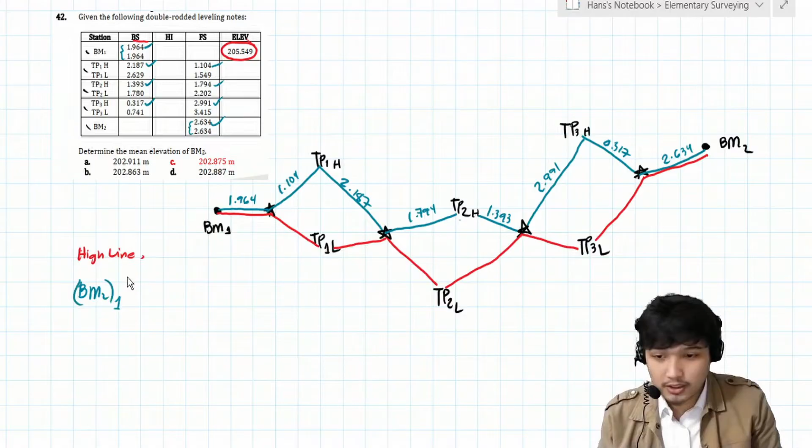So, with that, masolve na natin, no? So, let's say, benchmark 2, tas pangalan natin siyang sub 1, no? Or sub H na lang, class, for the high line measurement.

So, paano ba? So, ito, pangalanan ko to, class. Palitan ko na rin to, class, no? Ito, benchmark at B, using yung high line.

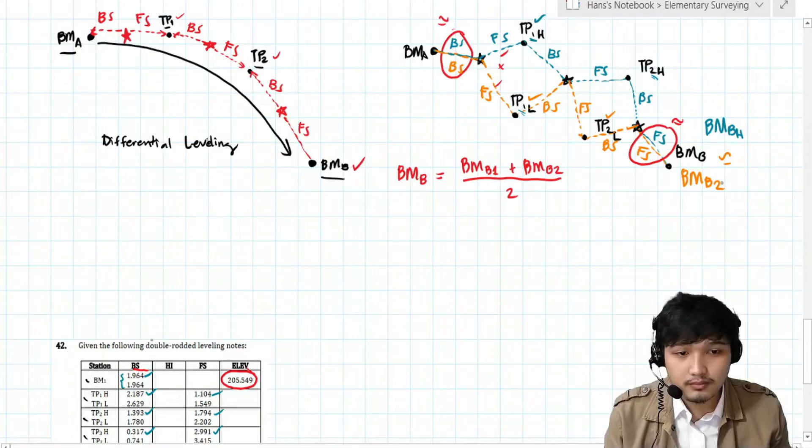Ito, magiging benchmark at B, tapos low line. So, magiging

Babago to para lang uniform. So, magiging benchmark at B using yung high line and then using yung low line.

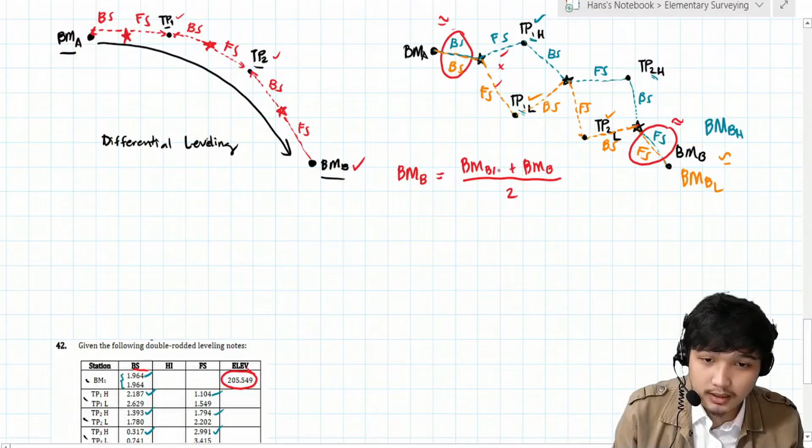Okay? So, ito na. So, therefore, benchmark at 2 using yung high line equals sa benchmark 1. Ilan to, class?

So, this one is 205.549.

So, lagyan muna natin, no? So, benchmark 1 plus summation ng backsight sa high line minus summation ng foresight sa high line. Okay? Gets ba? So, consider lang natin lahat ng high line. So, magiging

205.549 and then plus yung summation nito is 1.964 plus

2.187 plus 1.393 and then plus 0.317 and then minus yung mga foresight sa high line.

Okay, so using yung high line, so ilan yung magiging reading, no, ng elevation ng benchmark 2.

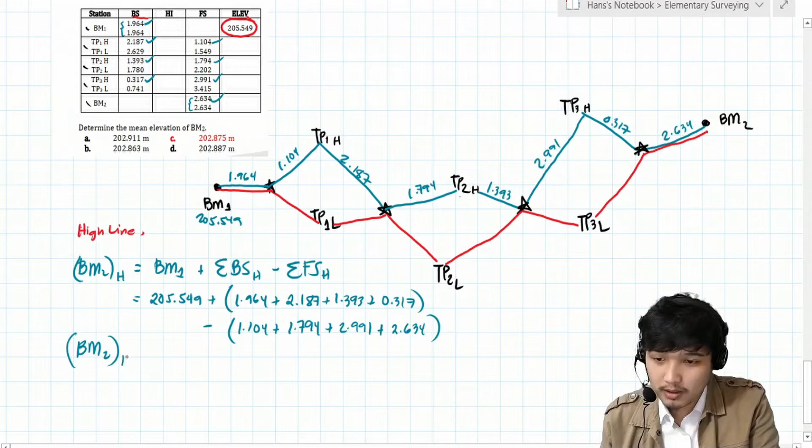Okay, so ang sagot is 202.887. So, check ko lang ulit, class.

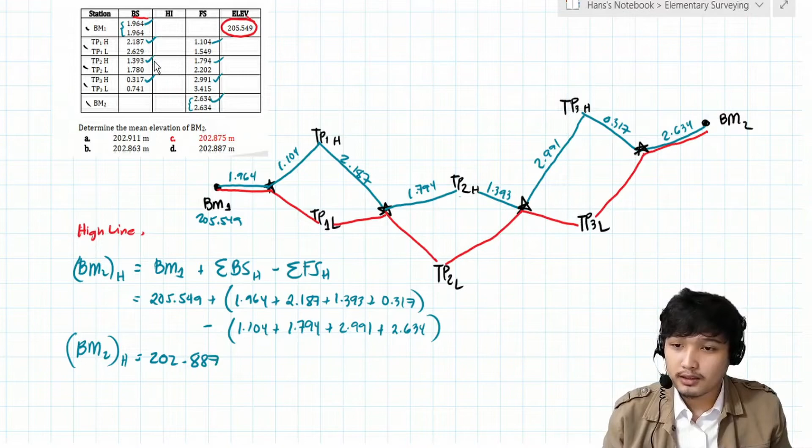Okay, so correct. So, consider naman natin, class, no, yung low line. So, for low line tayo.

Low line. So, considering yung red, so, nag-backsight, ilan ito, class? 1.964. Nag-foresight. So, ito, nag-foresight sa turning point 1.

So, 1.549. So, nag-backsight sa turning point 1. 2.629. And then, nag-foresight sa turning point 2.

So, this one is 2.202. And then, ayan. So, kompletohin lang natin.

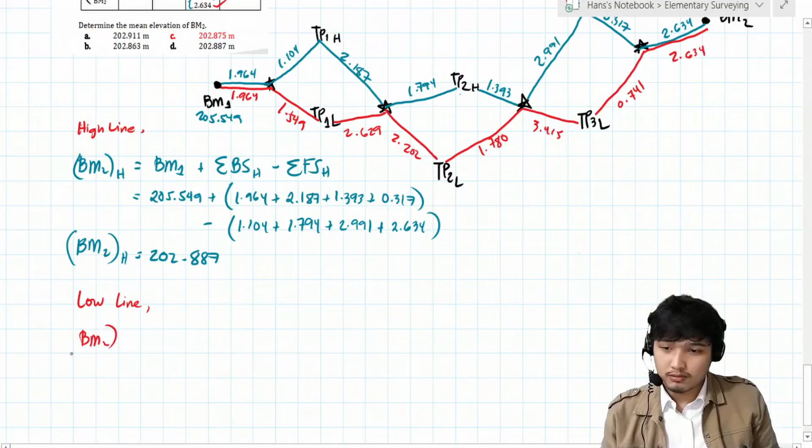Okay, so, ayun siya, no? So, the same. Benchmark 2 using yung low line equals benchmark 1 plus the summation ng all backsight sa low line and then

minus the summation ng all foresight sa low line.

So, simply plug in lang natin to, class. So, equals. Okay, so, ilan, class,

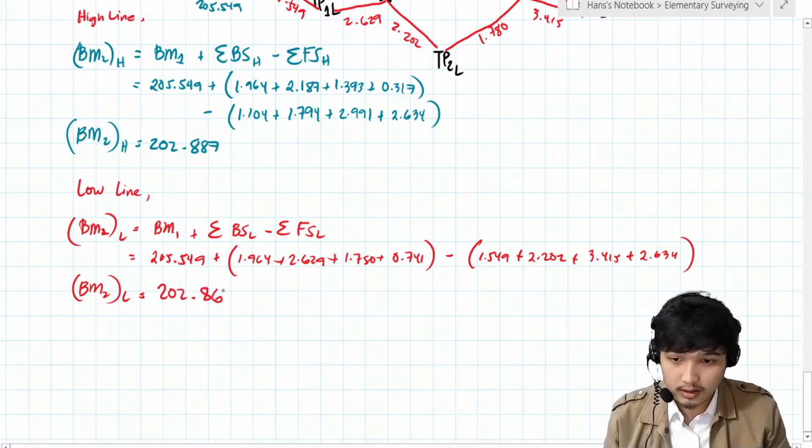benchmark 2 using yung low line? Okay, so ang nakuha kong value is 202.863. Okay, so check ko lang ulit, class.

Okay, so correct. Okay, so using yung two values, so makikita mo, class, almost the same sila. So that the average, no? That the average

elevation ng benchmark 2 is equal sa benchmark 2 using yung high line and then plus benchmark 2 using yung low line divided by 2.

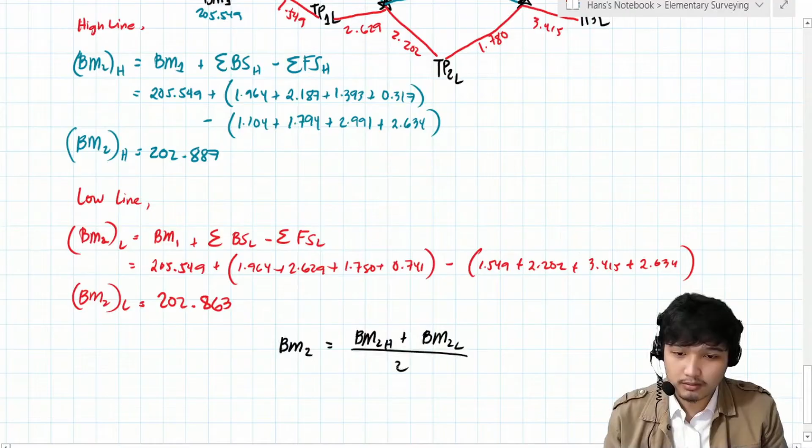So that is 202.887 plus 202.863 divided by 2. So ilan yan, class?

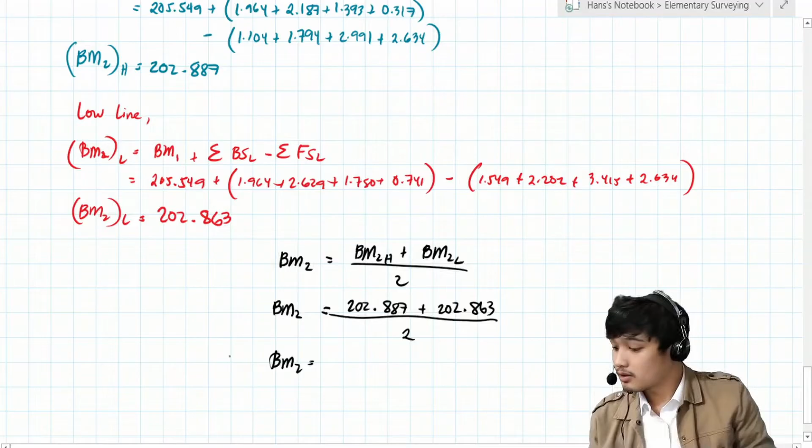So the answer is 202.875 meters. So that is letter C.

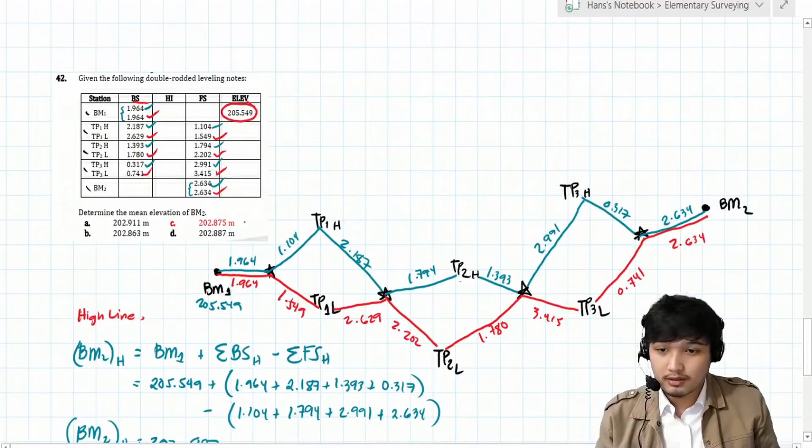So correct. Okay, so sana na-gets nyo, class, no? So ano lang siya, dalawang differential leveling at two different routes but at the same instrument setup.

Okay, so let's proceed ngayon sa next, which is yung ano ba?

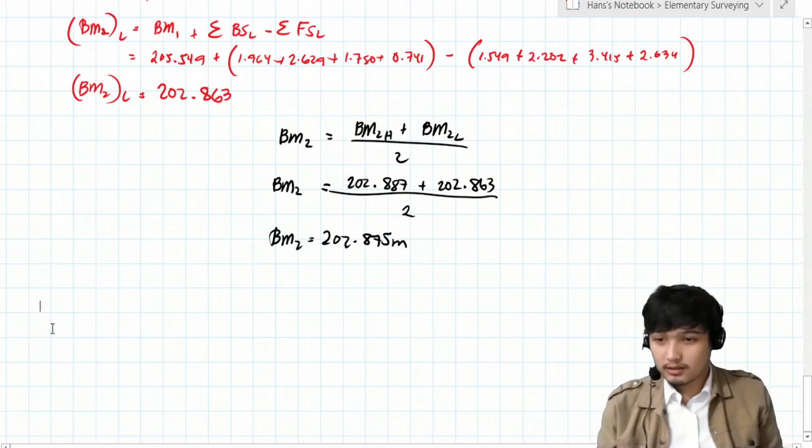Ang next natin is yung 3-wire leveling. So, paano naman yan, class? So, ito, madali lang din ito, class. Okay.

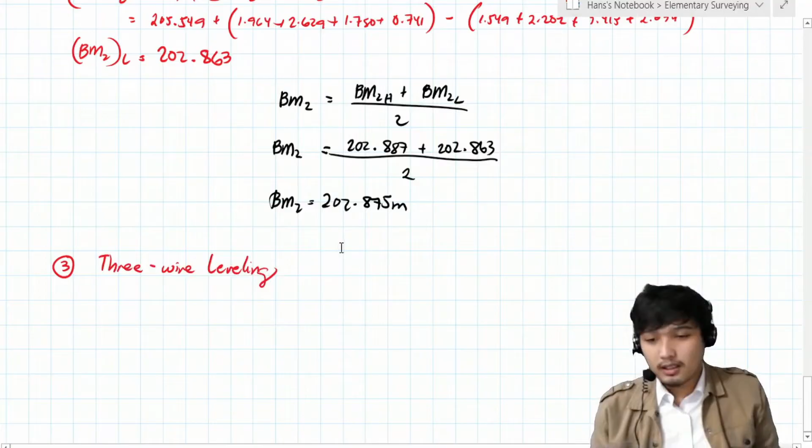3-wire leveling. So, dito, class, ang gagamitin natin ditong instrument is yung may capability no na mag-measure ng vertical distances using yung ano niya, 3 hairs niya.

So, yung katulad nung sa discussion natin regarding dun sa Stadia method, so dapat meron siyang middle hair, meron siyang upper hair, saka lower hair para meron siyang 3 readings.

Okay, so very simple lang din ito, class. So, same lang ito ng differential leveling. So, let's say, ito yung instrument.

So, ito siya, no? Okay, so tapos, so ito yung line of sight niya, horizontal.

So, andito yung rod natin. So, let's say nasa point A. So, dahil nga may capability siya na mag-measure ng upper reading saka lower reading.

So, magkakaroon siya ng tatlong reading. So, ito yung sa middle, ito yung sa upper reading niya. Ito yung lower reading niya.

So, lagyan natin upper reading, lower reading, saka middle reading. So, sino dyan yung backsight class?

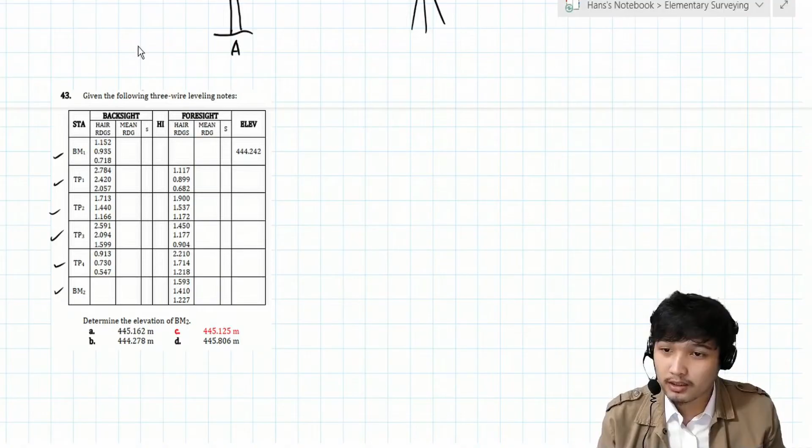So the first one corresponds to the upper hair reading. This is the upper reading, let's zoom in. The middle one corresponds to the middle reading, and this one corresponds to the lower reading. It's the same for the others, class.

So let's just get the mean. For this one, what is the mean? 1.152 plus 0.935 plus 0.718, divided by 3. So what's the average of that, class? That's what we can use as our backsight.

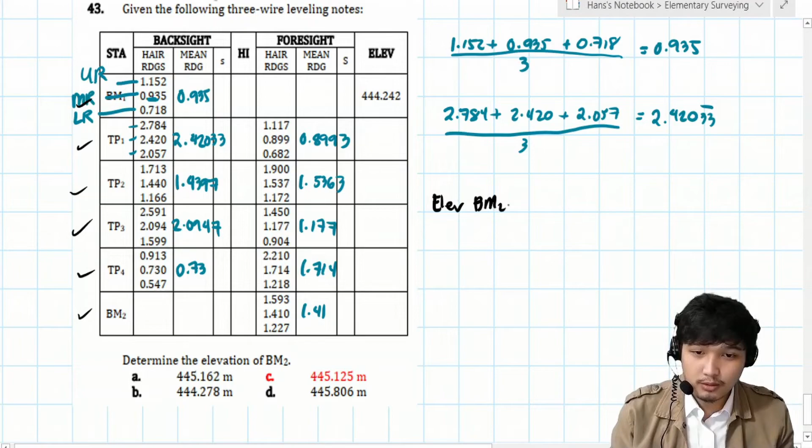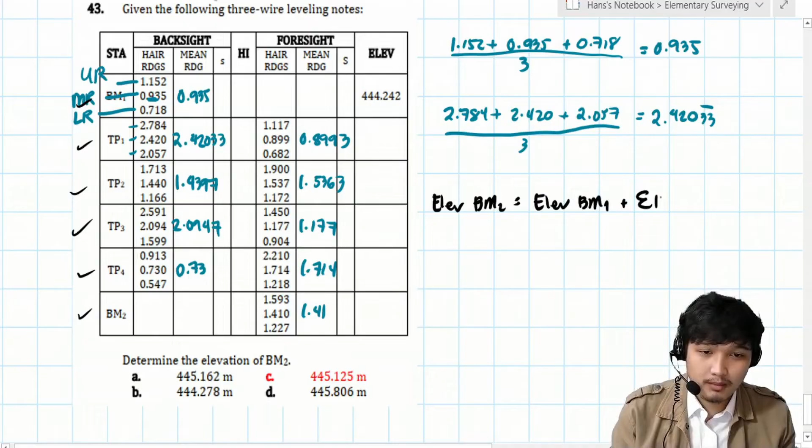Okay, so let's input the values. Elevation of benchmark 2 equals 444.242 plus 0.935 plus 2.4203 plus 1.4397 plus 2.0947 plus...

0.73, and then minus the foresights: 0.8993 plus 1.5363 plus 1.177 plus 1.714 plus 1.41. So how much is the elevation of benchmark 2, class?

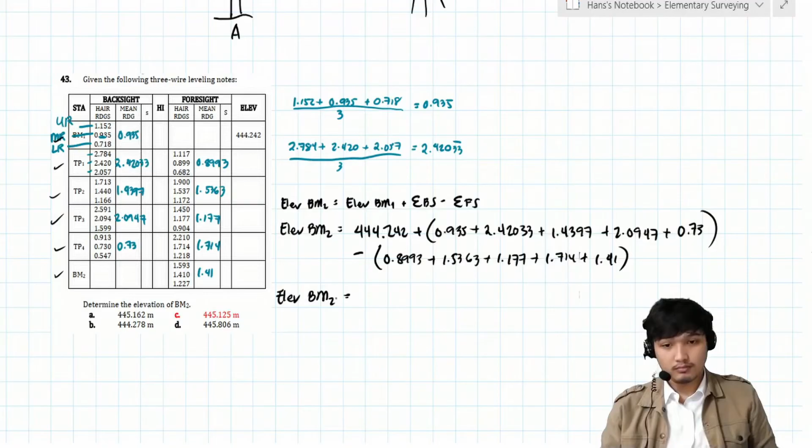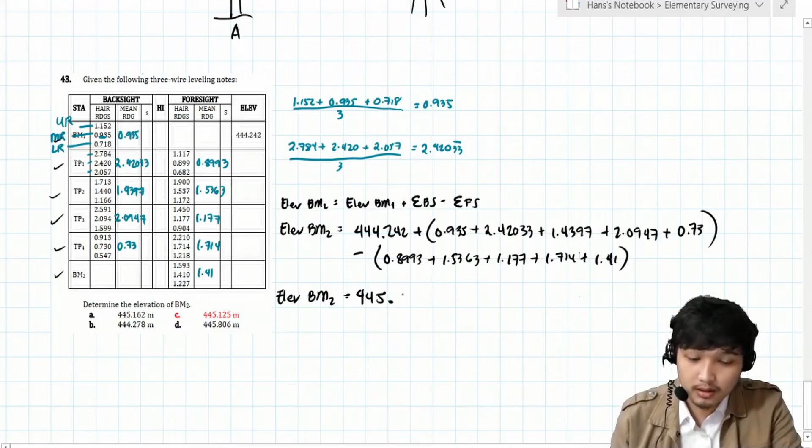Okay, so the answer, class, is 445.125 meters. That is letter C.

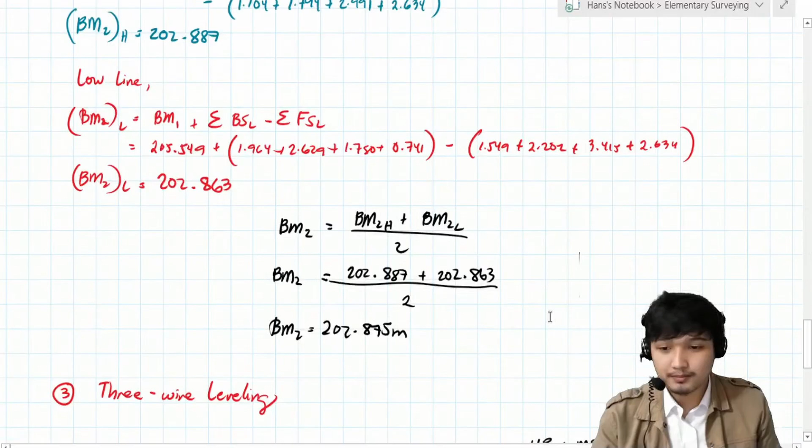And the same goes for 3-wire leveling. This is also a more accurate measurement of vertical distances because we consider the upper hair reading, middle hair reading, and lower hair reading. Unlike typical differential leveling, where you only take the middle hair reading. Here, you consider all three hairs.

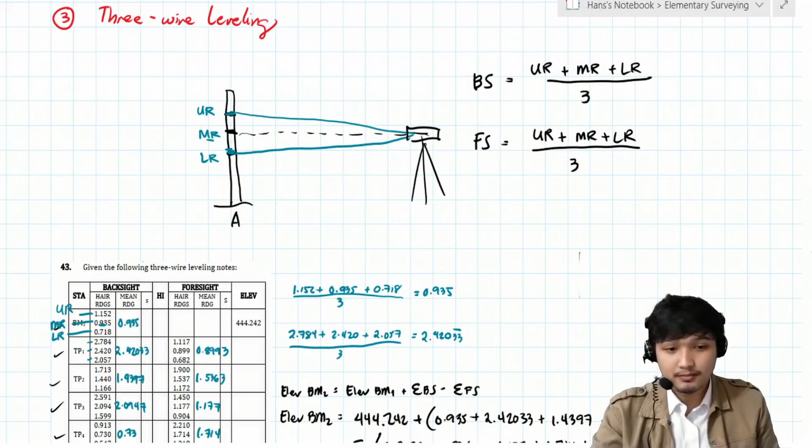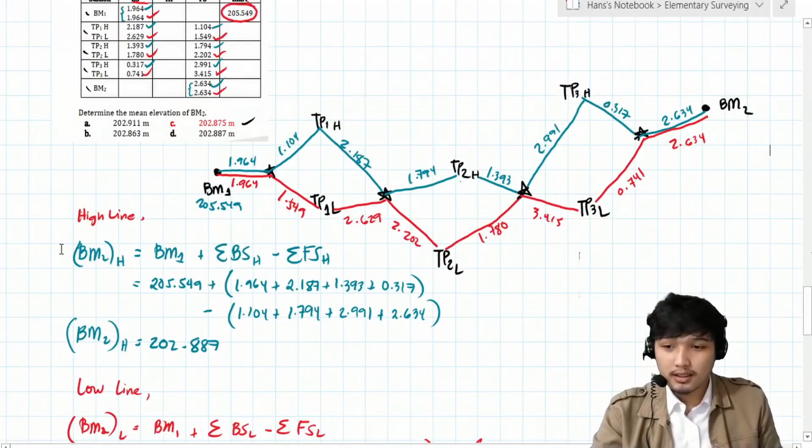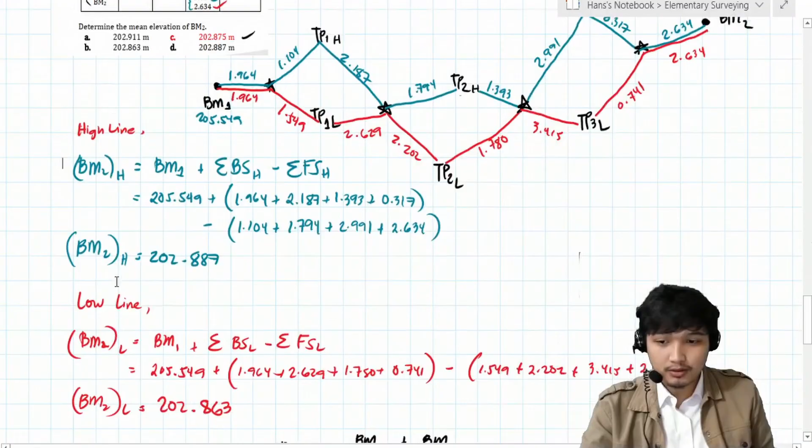Okay, so nakita niyo yung procedure natin dito, class, no? Medyo tedious siya kasi kailangan makuha muna natin yung benchmark or elevation ng benchmark using yung high line alone tapos yung low line alone. Tapos i-average natin. Class, pwede yung ganitong solution.

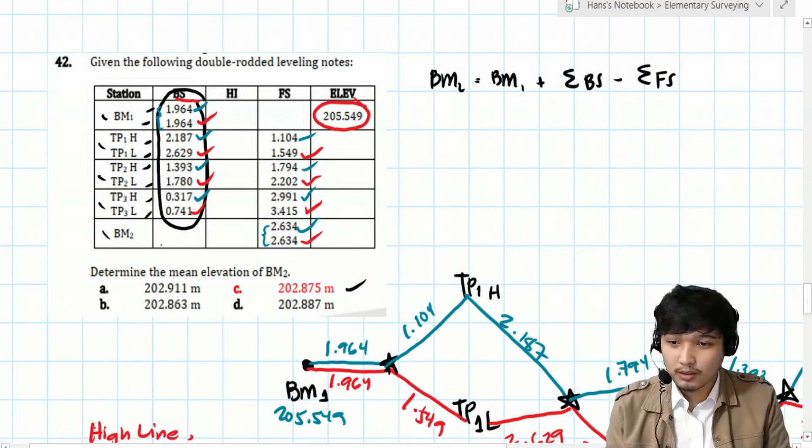So kung ang tinatanong lang naman, class, is yung mean elevation, ang gagawin ko, balikan lang natin: benchmark 2 is equal sa benchmark 1 plus summation ng backsight and then minus summation ng foresight. So ang gawin lang natin, imbis na isa-isahin natin, i-plus natin ito. Yun nga lang, dahil twice yan ni-read, so i-divide natin sa 2. Ipag-plus natin ito and then divided by 2.

So yung summation ng backsight is equal sa, sulat ko lang, class. Okay so ayan, ilan yung equivalent summation ng backsight? Sa method na to, hindi ka na rin malilito kung sino ba yung titignan mo. Kasi nangyari, nagko-cross-cross yung tingin natin, nakaslant kasi. Dito, dire-diretso yung backsight, i-plus lang natin and then divide natin sa 2. So makuha na natin yung average backsight. Ilan yan, class?

Sagot 6.4875. So ganun din, class, dito sa foresight. I-add mo sila and then divide sa 2. Hindi ko na susulat, class, direct na natin sa calc. Ilan yan, class? Sagot is 9.1615.

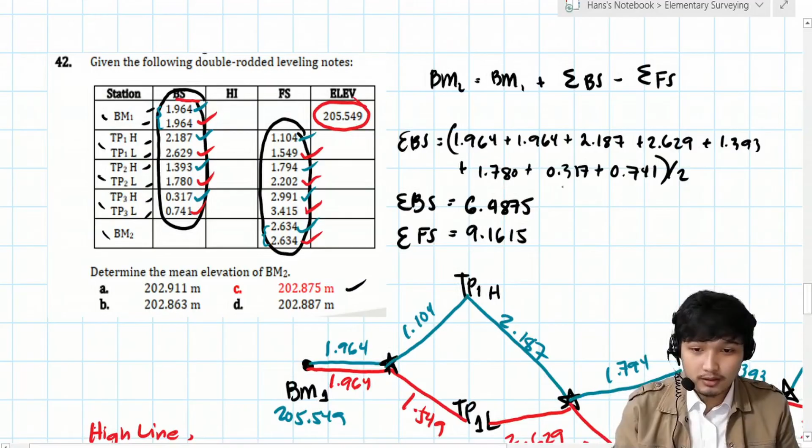Okay, so sana nandiyan kaya, class. So therefore, ilan ngayon ang magiging elevation ng benchmark 2? So that is 205.549 plus 6.4875 and then minus 9.1615. Ilan yan class? Sagot is the same, which is 202.875 meters. So letter C.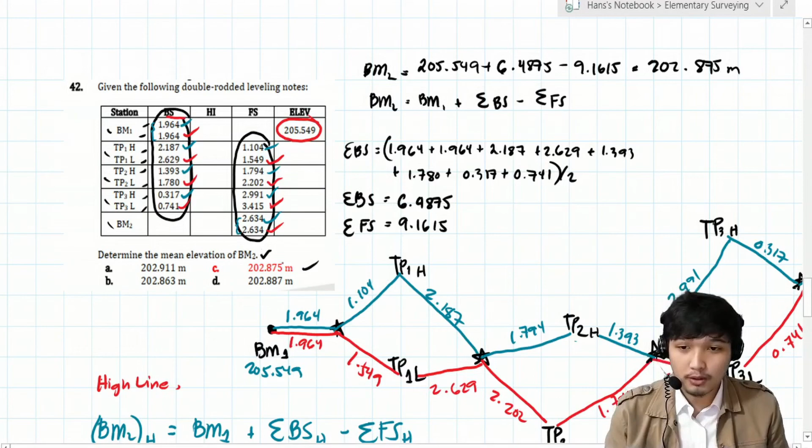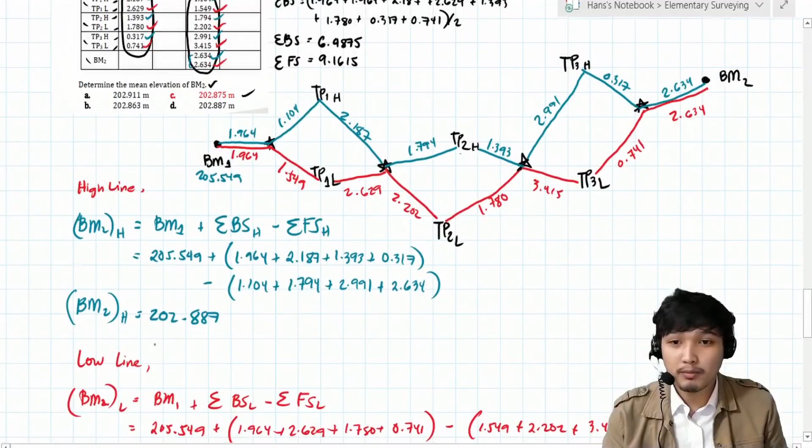Tinuro ko to, class, kasi very useful ito, lalo na kung ang tinatanong lang is yung elevation ng benchmark 2, direct to the point. Pero, class, tinuro ko rin ito para kung maitanong man sa inyo, halimbawa, tinatanong lang yung considering yung high line o considering lang yung low line, kaya mo pa rin siyang masagutan. Okay, yun lang naman.

And then lastly, dito naiisip mo ba yung naiisip ko, class? Dito, ginawa natin, in-average natin siya isa-isa. Sobrang tedious nun, class. So ang laki rin nun na ang tendency magkaroon tayo ng error. Kung may isang error dyan, error na yun sa buo, lalo na kung tinatanong is yung benchmark 2. Naiisip mo na ba naiisip ko, class?

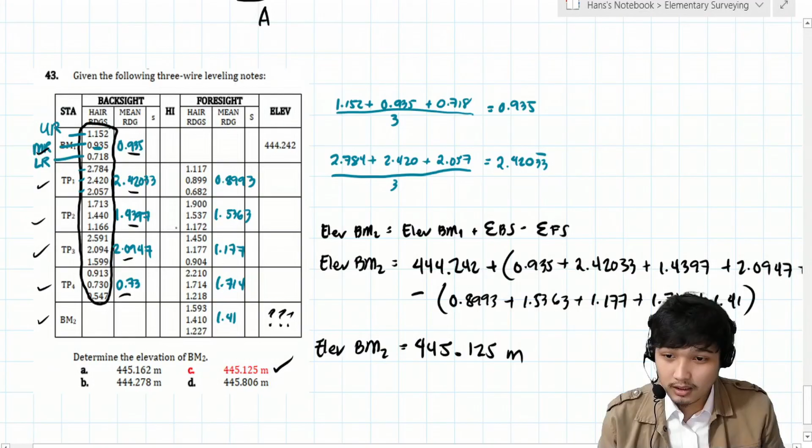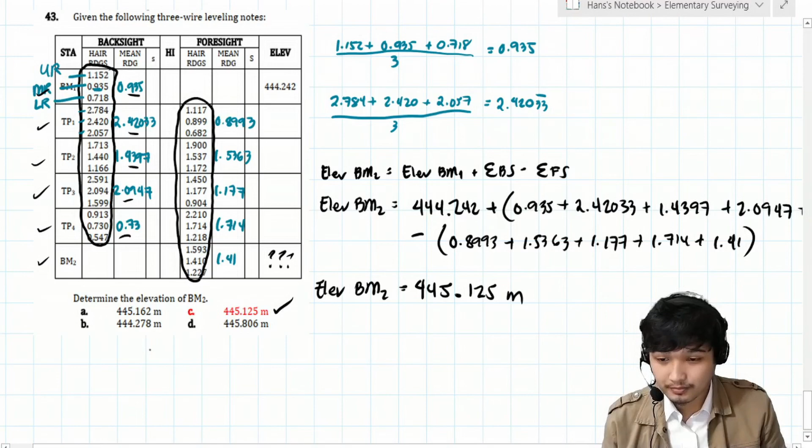Yes, no? Ang gawin natin, i-plus lang natin ito, class, and then dahil tatlo yung measurement, divide natin sa 3. Tas ganun din ito, class. I-plus natin silang lahat and then i-divide natin sa 3. Sige class, ilan yan? Backsight equals, sulat ko ba? Gets mo na yun class. Ilan yan class? Ilan yung backsight? Ilan yung foresight kapag dinivide sa 3? Ito. Okay, so sige.

Okay, so ang lumabas sa calculator ko class is, i-check nyo na lang, i-review nyo na lang. So 7.61967. And then etong isa is 6.73667. So check nyo na lang class, so later on check ko na lang din.

So that the elevation o yung benchmark 2 is equal saan? So yung reference natin, yung 444.242 plus yung backsight natin, summation, 7.61967, then minus summation ng foresight, 6.73667. Ilan yan class? Okay, so direct to the point, isang solution lang, isang pag-average lang, nakuha na natin yung elevation ng benchmark 2. Ilan yan class? Okay, sagot is 445.125 meters. Okay, which is the same.

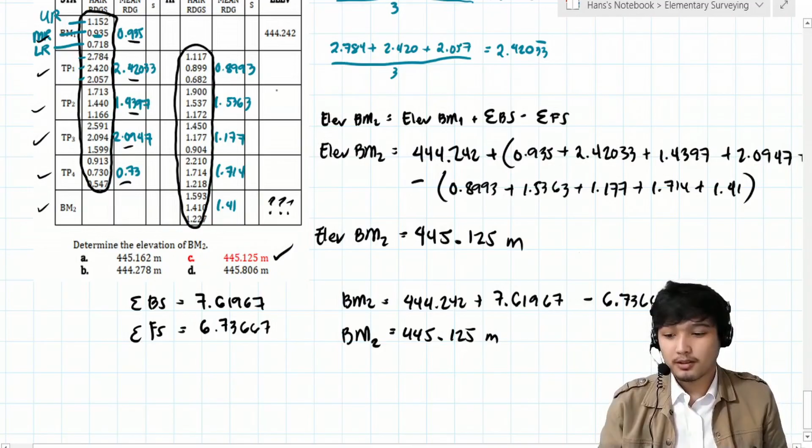Okay, so hopefully guys, nakatulong itong video na to sa inyo. So may natitira pa tayo class: profile leveling saka yung reciprocal leveling. Madali lang din yun class, kung ano yung konsepto na natutunan nyo dito. Same lang yun, yun nga lang, iba lang yung approach kung paano siyang sineset up in actual.